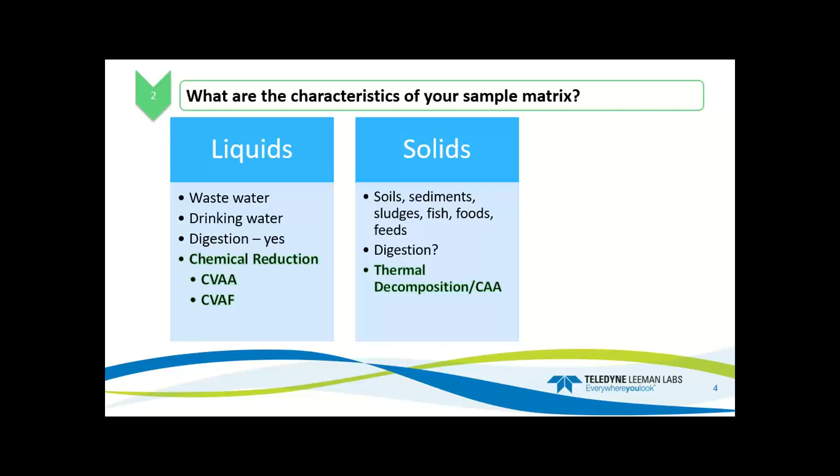So what are the characteristics of your sample matrix? If your sample is a liquid, like wastewater or drinking water, then you will most likely be best served by one of the chemical reduction techniques, like cold vapor atomic absorption or cold vapor atomic fluorescence. If your sample is a solid, you have the choice of digesting the sample and then analyzing by atomic absorption or atomic fluorescence, or you can eliminate the sample pretreatment altogether and employ direct analysis by thermal decomposition.

There are some other factors to consider. For example, the homogeneity of the sample, or known interferences like iodine or gold. And we can also run volatile hydrocarbons, which is kind of a unique matrix in itself. So some solid samples might need to be digested, and some liquid samples might be better using direct combustion. So it's really important to think about your sample characteristics when you're deciding on a technique.

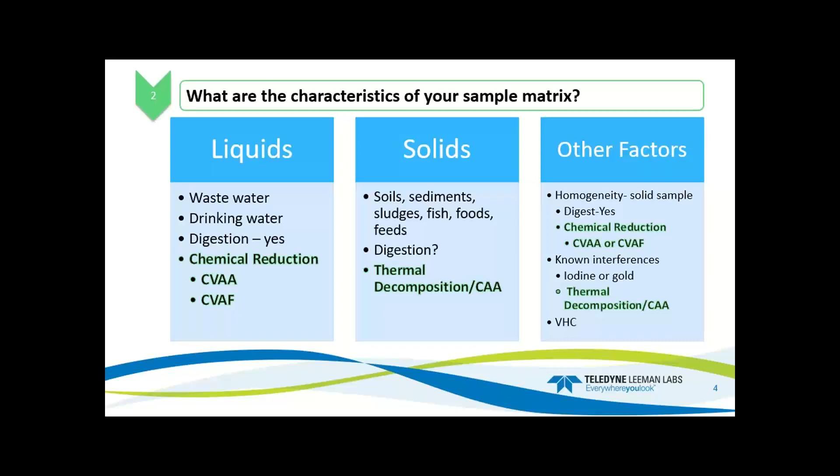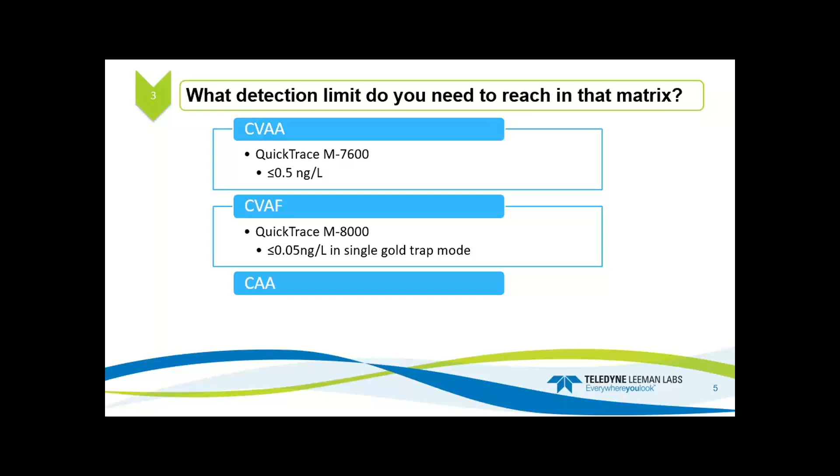So if your sample is a liquid, then detection limit requirements will drive your decision. So our QuickTrace M7600, which uses cold vapor atomic absorption, will provide a detection limit at less than 0.5 nanograms per liter. Cold vapor atomic fluorescence, using the QuickTrace M8000 instrument, will provide even lower detection limits at less than 0.05 nanograms per liter when using single gold trap modes.

And combustion atomic absorption has an instrument detection limit at less than 0.001 nanograms. But it's important to note that this value is from a mass-based analysis. So aqueous samples run on this type of system will have an increased detection limit, simply because the amount of mercury found in an aqueous sample is inherently more dilute than that of a solid sample. So it's important to keep in mind.

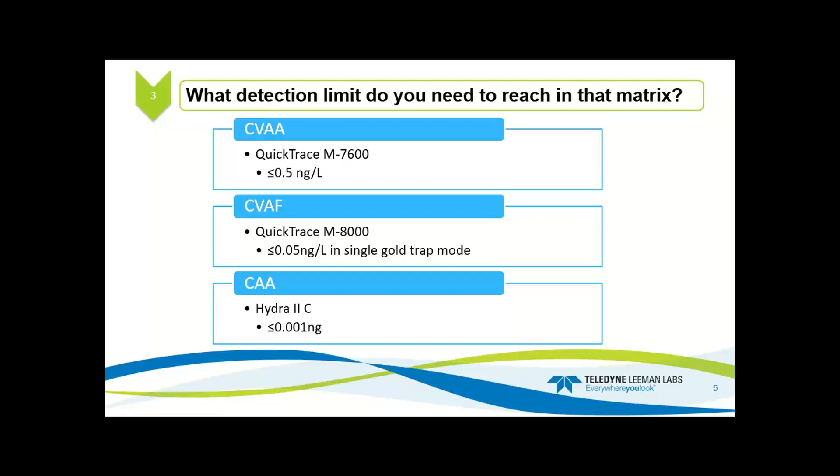Do you have a digestion procedure in place? So the digestion process for most aqueous samples is straightforward, and laboratories often have all the equipment necessary to perform this task already. Some laboratories split digested samples with other instruments like ICP-MS or ICP-OES, so sometimes it's just more practical to share samples. Or if you know your sample cannot be easily homogenized, then direct analysis can be inaccurate. So digestion of a larger sample size and then running on a reduction method is the safest route to ensure results that you're confident in.

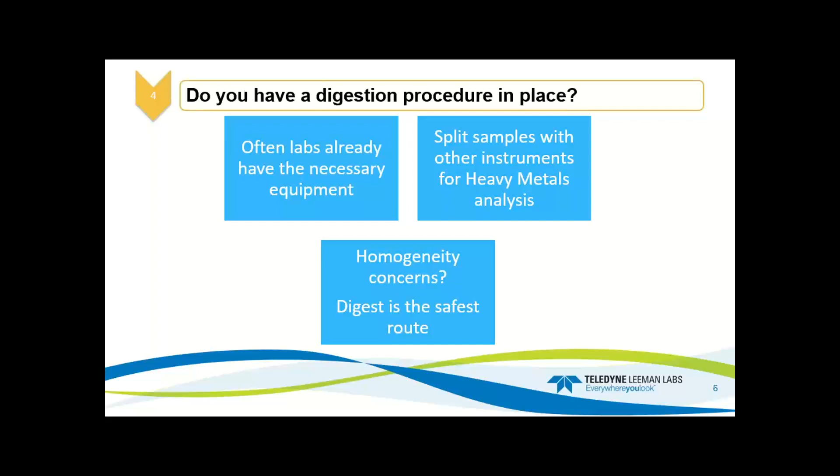And of course any budgetary considerations. So cold vapor atomic absorption is going to be the most economical choice in most markets, followed by cold vapor atomic fluorescence. So this has the best detection limits and the widest dynamic range for aqueous samples. You should also compare it to the cost and the wait time of sending samples out for this type of analysis if you don't already use it in your laboratory.

In combustion atomic absorption, the simplicity of this method is appealing. It also will help with your green initiatives in your laboratory, but it is a higher initial investment. So it provides advantages over time. So there's no sample digestion. You don't need to buy strong mineral acids or expensive reducing agents like stannous chloride.

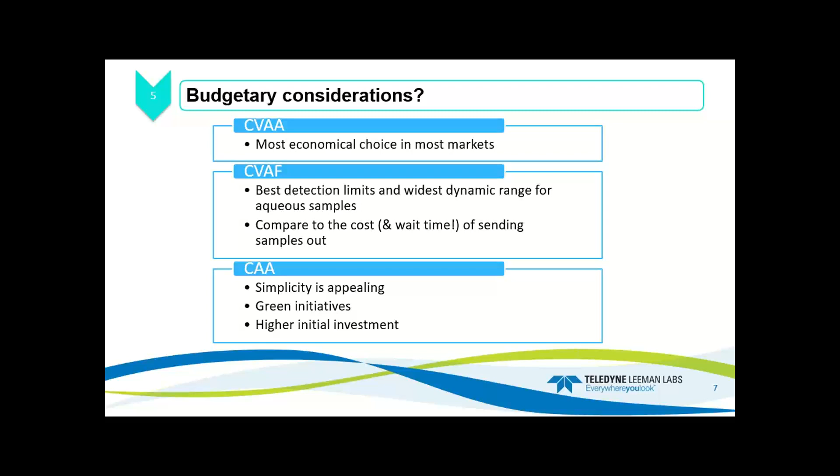There's no hazardous liquid waste generated that could be costly to have removed. So some of those will add up to savings. As well, with no wet chemistry prep, it also frees up your lab analyst time. And we all know that's valuable. So what technique is right for your application?

So now that we've gone through the 5 essential questions, I hope you've considered each of them for your laboratory situation. So keep those in the back of your mind as we highlight our most popular instrument for each of those techniques. This is kind of a family portrait of our Mercury instruments here at Teledyne Leeman Labs. So first up, we have the Quick Trace M7600. This operates by chemical reduction of the sample, followed by cold vapor atomic absorption. So it can measure mercury in the sub-nanogram per liter to high microgram per liter ranges.

Then we have the Quick Trace M8000. So this also operates by detecting mercury in aqueous samples by chemical reduction, but it has the option to pre-concentrate the mercury using gold trap amalgamation, and it's followed by cold vapor atomic fluorescence. And last but not least, we have the Hydra 2C. This operates by thermal decomposition of the sample, followed by gold trap amalgamation and atomic absorption. So it's best utilized for solid samples and typically requires no sample pretreatment. So let's start with the M7600.

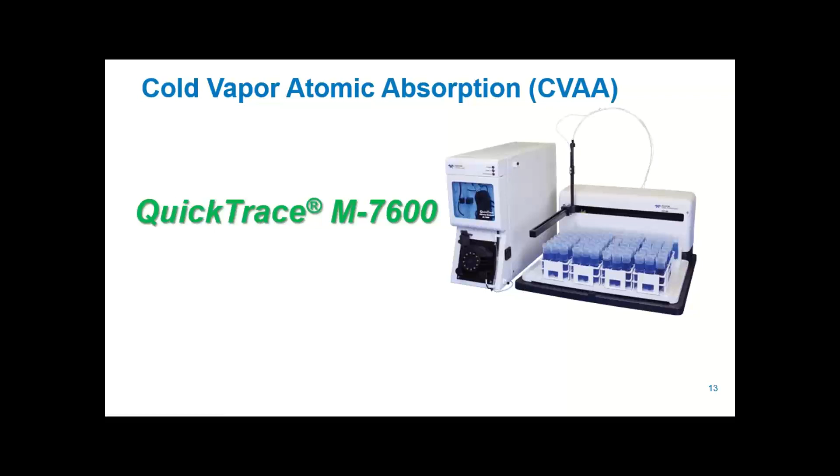So here it is. It's modeled after a desktop computer tower, so it takes up very little benchtop space. Here it is paired with the optional ASX560 auto sampler by Teledyne CETAC to automate sample introduction. So let's take a look at some of the key benefits and features of this instrument. The Quick Trace M7600 is the industry leader for mercury detection by cold vapor atomic absorption. It's trusted by large lab networks throughout the US and Europe. We have preloaded common method templates built into the software, so analysts can just press go.

This instrument will also help support your green chemistry initiative. So we've created a small inner diameter tubing harness that reduces sample consumption, reduces reagent usage, and liquid waste generation. We have developed methods using those tubing harnesses that are very efficient. They're only about 70 seconds a sample in peak area mode. So at that rate, you could run almost 50 samples in an hour. And you get all the benefits from the reduced chemical usage.

And another key benefit is its flexibility. So this is our most versatile system. So while it has common methods preloaded into the software, like I mentioned before, it's easy to adapt the usable ranges by making adjustments in the software. So there's no hardware changes needed. This is great for academia and research labs. And also the Quick Trace software itself that runs the instrument is very flexible, has multiple pathways to guide you through the user interface. It's very intuitive, but it's also customizable.

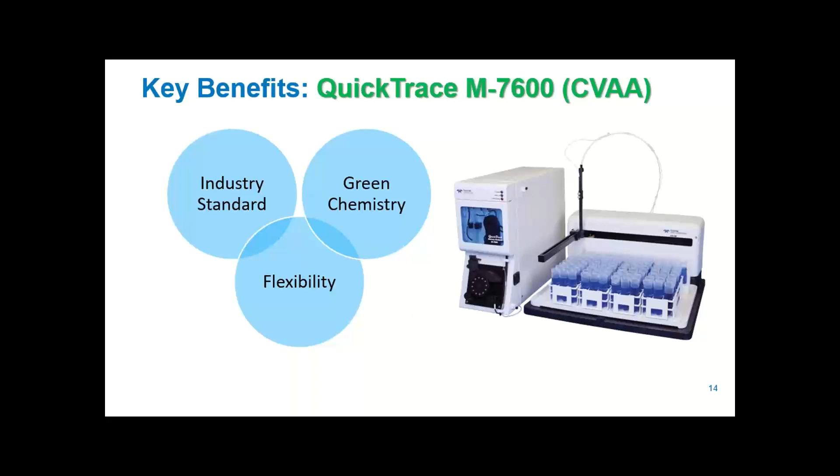So let's dive into some specific features that set this instrument apart. So first we have our gas liquid separator, our GLS. It has a frosted center post design. This provides a large surface area to liquid volume, which allows for rapid evaporation of the mercury vapor from the sample. That stable, thin film over the post provides reproducible signals and precise results. It's non-bubbling, it's non-foaming, and it also has overflow prevention built right into the mount.

Next is the peristaltic pump. It's a 12-roller, 4-channel peristaltic pump. It's top of the line. It's the same kind that's used in high-end ICP instruments. It also provides very stable liquid uptake, so that helps contribute to those reproducible signals.

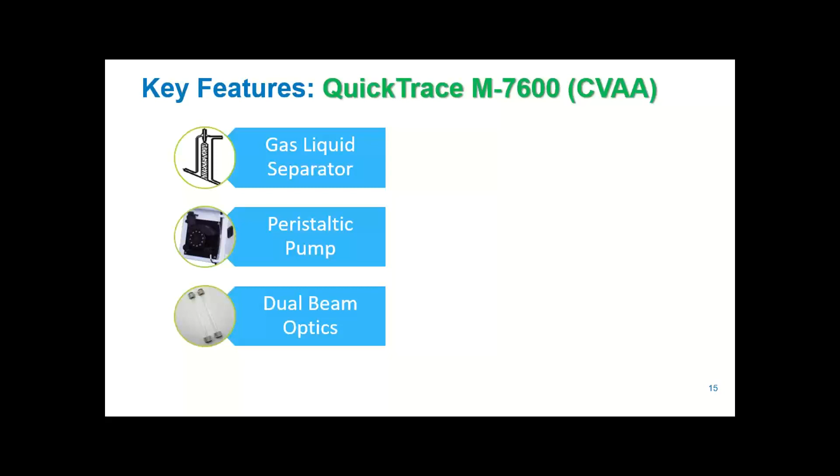This instrument has true double beam optics, so it has a superior baseline stability. The detector compartment is thermally stabilized. We also have a feedback monitor that will make automatic adjustments to lamp energy for stability throughout the lifetime of the lamp. This is important because it keeps your IBL constant even as your lamp ages.

Green initiative, I mentioned this a little bit before, but using our green chemistry tubing harness, you can reduce the total waste generated by about 40%. It also reduces stannous chloride reagent uptake by 53%, which if you buy stannous chloride, you know how expensive it is. So that can add up to substantial savings over time.

The QuickTrace software is extremely flexible and intuitive. It has advanced contamination controls, overrange detection, and smart rinse features built right in. It offers tracking of consumables and maintenance tasks and will alert you when they need done. And one of my favorite features is that the worksheet files can be emailed directly. So you can send them to your team members, you can send them to our service team if you need method development help or system troubleshooting. It makes it really easy.

And speaking of our service team, we have an unparalleled no-hassle support team. So we're available anytime to help with troubleshooting, method development, spare parts, training opportunities, whatever you need, we're here for you. So we will never just install your instrument in the lab and walk away. Getting your business is just the beginning of that relationship for us. We want you to be successful.

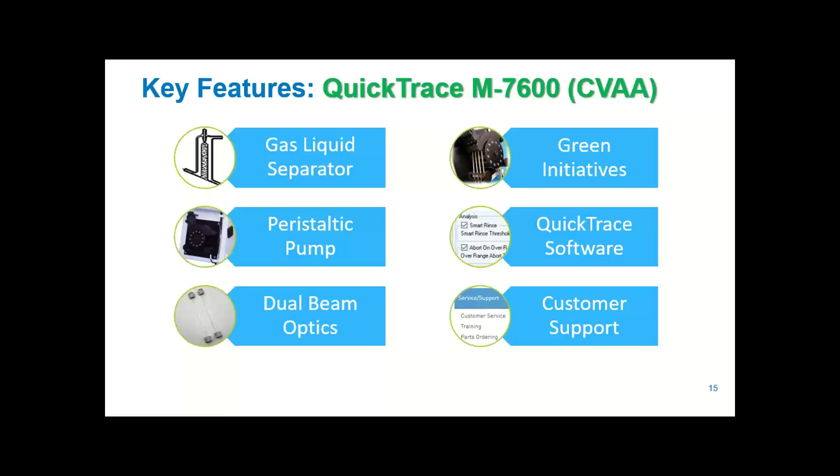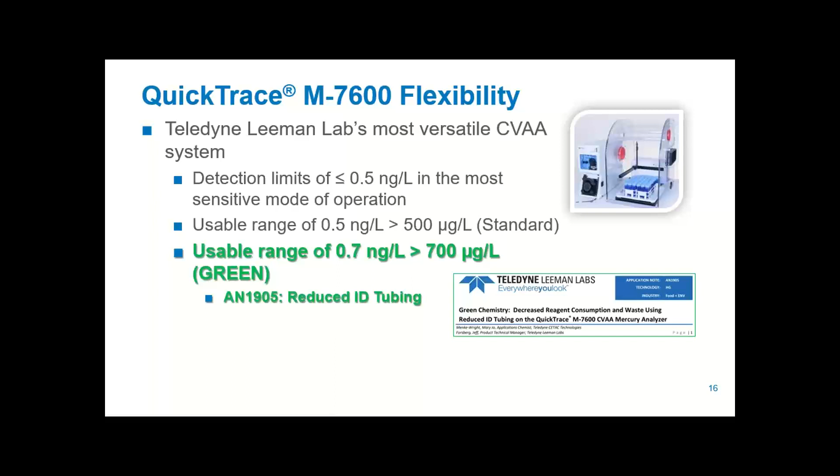So again, it's easy to adapt the usable ranges of this instrument by making changes in the software. So by simply changing the pump rate, the sample uptake, and the gas flow, one of those, all 3 of those, it's up to you. You can change the response range of the instrument to fit your application.

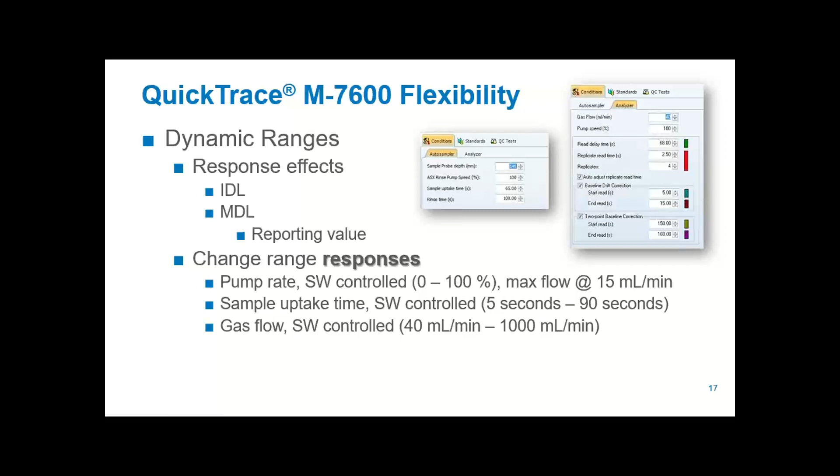So here's the flow path and some of the theory of operation behind the M7600. So the sample and reagents flow to the GLS by the peristaltic pump. The stannous chloride mixes with the sample and reduces any mercury in the +2 valence state to its elemental form, mercury 0, while they travel to the GLS. So the liquid mix flows over the center post.

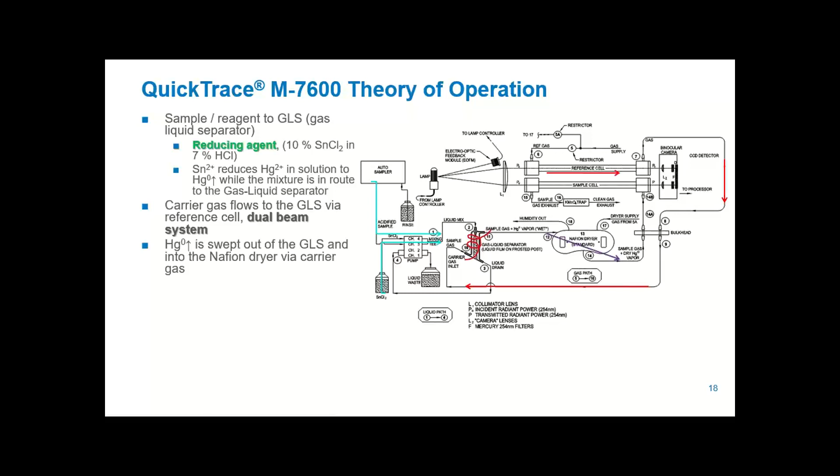The carrier gas then flows to the GLS by the reference cell and sweeps around the center post. This sweeps the mercury vapor into the Nafion dryer and removes the water vapor from the gas stream. And then the dry mercury vapor flows into the sample cell to be detected by absorbance with an incident light source of 253.652.

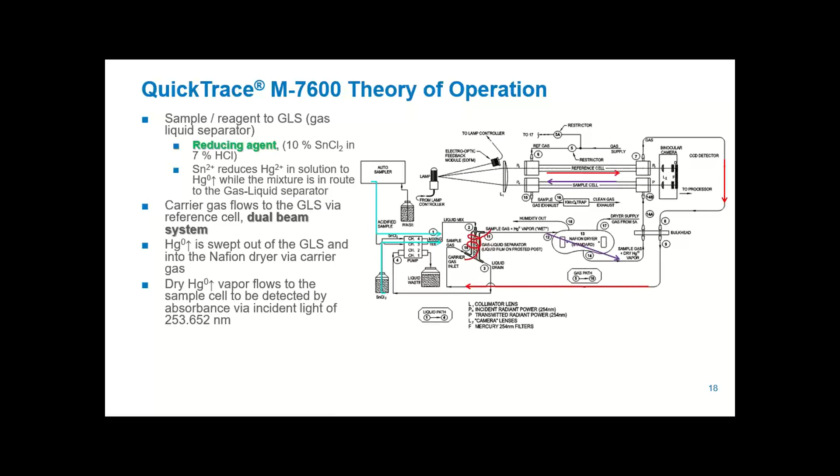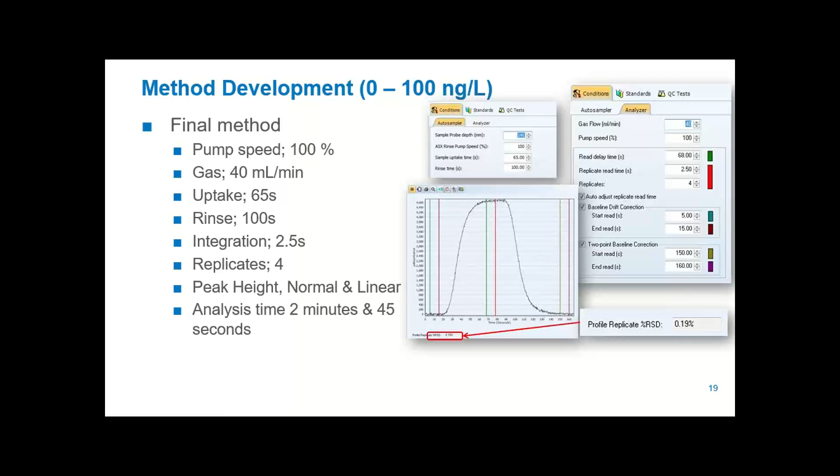So here is a typical 100 ppt peak profile. So here are the settings on the left for the instrument. And you can see we get this beautiful plateau where our peak is integrated across the maximum peak height. And it comes all the way back down to the baseline in about 2 minutes and 45 seconds. And you can see the replicate of those integrations is only 0.2%.

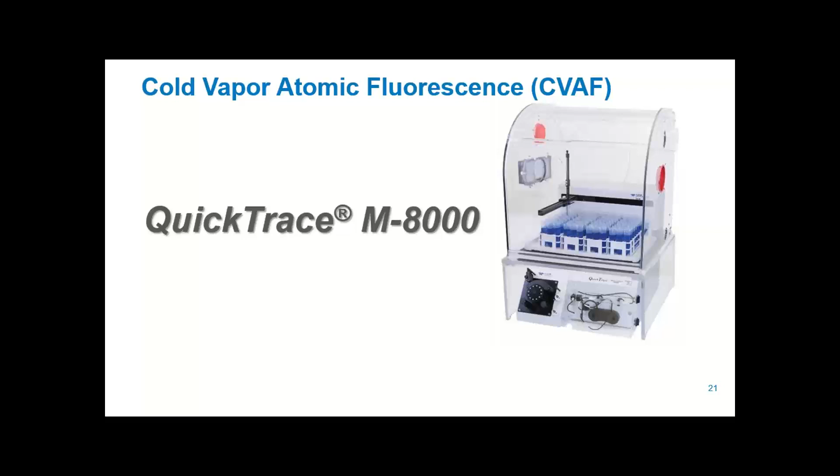So let's go ahead to the M8000. So this setup utilizes a platform. You can see the ASX 560 autosampler is on top of that, and then there's an enclosure around the autosampler. So it has this stackable design that just sits perfectly on top of each other. So it helps reduce the footprint on your desktop, and also just looks nice and clean and sharp.

So what benefits set this apart from other instruments? So foremost is the ultratrace analysis. This instrument can reach levels as low as 50 picograms per liter when utilizing gold trap amalgamation mode. So it's made to satisfy the lower and lower limits required for clean water analysis.

It also has ambient air control. So since this instrument does use pre-concentration of mercury on a gold trap, mitigating mercury contamination from the lab environment is very important. So this system has intuitive gas controls that eliminate air infusion onto the gold trap during the sample probe movement. So ambient air is diverted away from the gold trap, and any mercury contamination in that air goes to vent. So it doesn't have an additive effect on the sample.

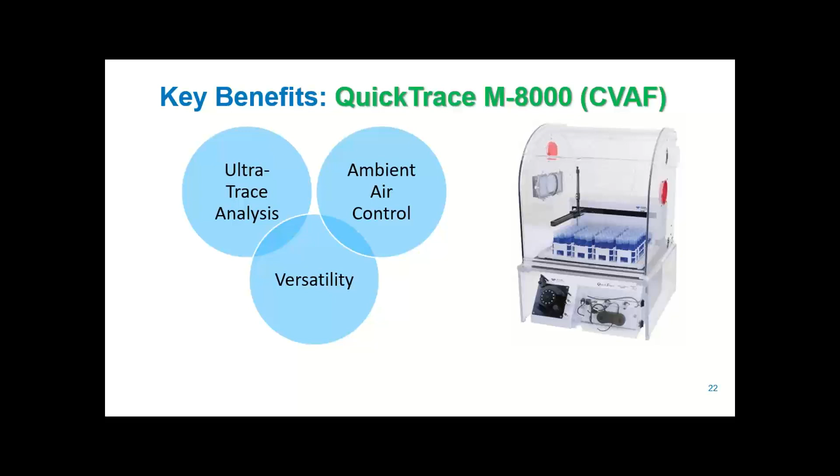It's also very versatile. So while we really boast about those ultra-low detection limits, it's versatile enough to analyze samples greater than 400 micrograms per liter without dilution. And this is because it has 3 modes. You have regular continuous flow CVAF, which is for those higher level samples, and then single or double gold trap amalgamation modes as well. You have access to all 3 of those modes in the software. There's no hardware changes or tubing configuration changes, so you can switch them out as you need.

So just like the M7600, this instrument features the gas liquid separator with the center post design, the top of the line peristaltic pump, and the reliable QuickTrace software. It also has 3 modes of operation: continuous flow CVAF, single or double gold trap pre-concentration followed by CVAF. And again, there's no need to make any hardware or tubing changes to use any of these modes. They're selected in the software.

And one of the biggest features is that this instrument can meet those low detection limits required for methods that are used to satisfy the Clean Water Act regulations. Again, it's easy to adapt the usable ranges of these instruments. So this instrument has 4 variables, so pump rate, sample uptake, and gas flow, like the M7600.

But it also has the option to lower the PMT voltage, which reduces the overall sensitivity of the instrument and can decrease the response. So you can change the range to fit your application. So typically this instrument can detect between 0.05 nanograms per liter up to more than 400 micrograms per liter.

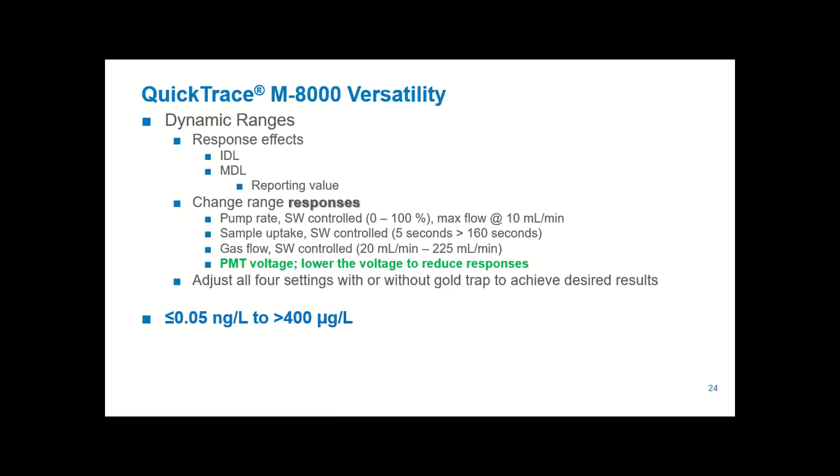So here is the flow path for the M8000 and some theory of operation. So it operates by cold vapor atomic fluorescence, as I've said. So we're going to digest our samples to get the mercury into the +2 valent state. Then we're going to reduce that to elemental mercury by sodium borohydride or stannous chloride, depending on your method.

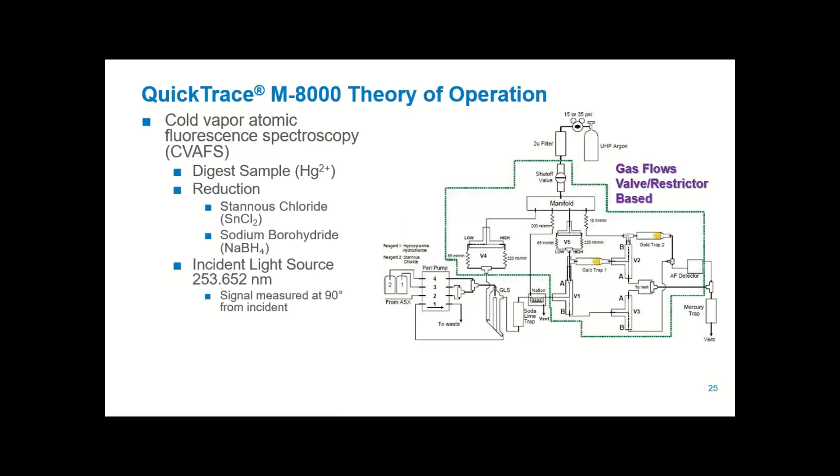And then we'll detect it with an incident light source at 253.652. And atomic fluorescence is the signal measured at 90 degrees from the light source. So let's start with our carrier gas flow, which is a high purity argon. So our carrier gas flow is controlled by a series of restrictors and valves. So depending on the mode of analysis, you'll run at 15 psi or 35 psi.

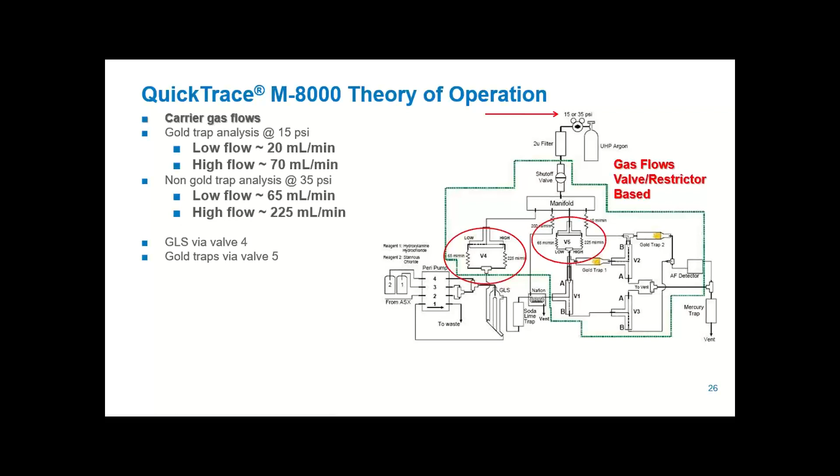And then the GLS is supplied from V4, while the gold trap is supplied via V5. So here's the flow path. The sample and reagent flow to the GLS by the peristaltic pump. The stannous chloride mixes with the sample and reduces any mercury into its elemental form while they travel to the GLS.

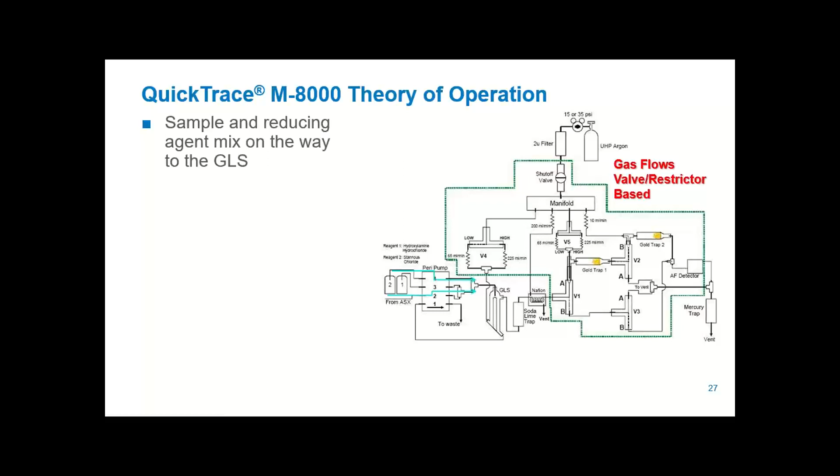That liquid then flows over the center post. The carrier gas flows towards the GLS and sweeps around the center post. So it takes that elemental mercury vapor into the Nafion dryer, which removes the water vapor from the gas stream. The dry mercury vapor flows into valve 1. In non-gold mode, which is continuous flow, the gas will flow from V1 to V3 and then on to the atomic fluorescence detector.

In gold trap analysis mode, the gas will flow from V1 to V3 during that ambient air control time I mentioned before, and then it will switch from V1 to V2. So this will load the gold trap with the mercury from the sample, and once it's loaded, the trap is heated, and the concentrated mercury will flow into the atomic fluorescence detector.

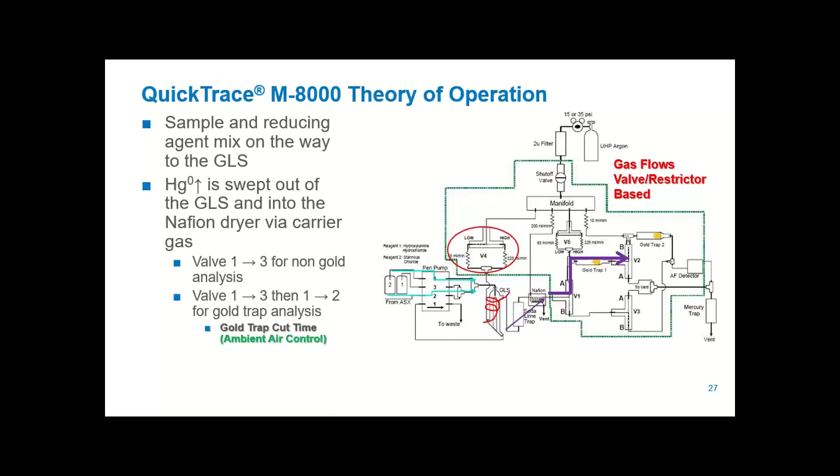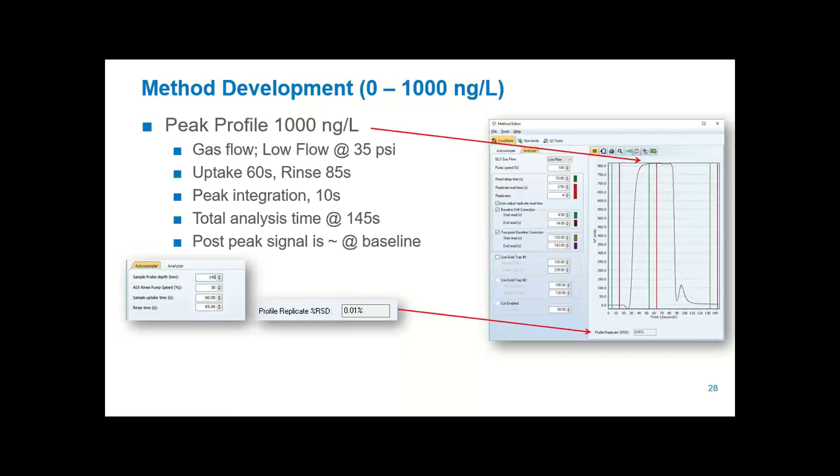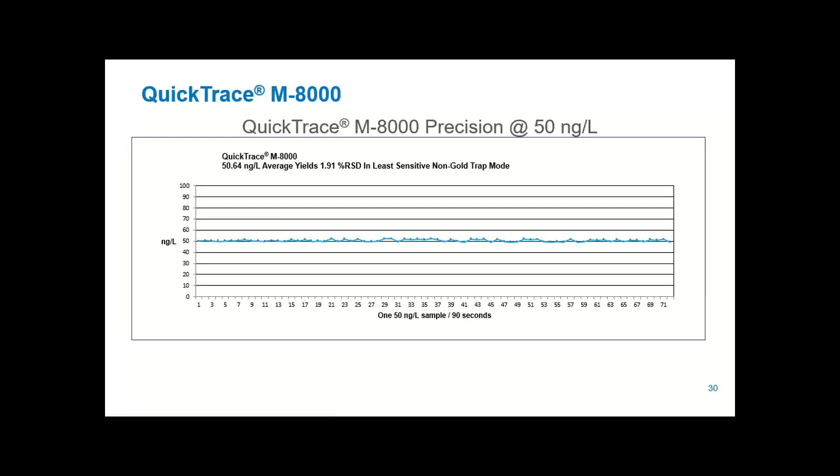So is cold vapor atomic fluorescence and QuickTrace M-8000 right for your application? If you need to run any of these methods, 245.7, 1631, some European norm methods, ISO methods, then you will need to use atomic fluorescence. These samples can include liquids, sediments, or tissues. They will need to be digested. If your detection limit needs to be less than 0.1 for continuous flow or less than 0.05 for gold trap mode.

And ultratrace analysis is a worthwhile investment in your laboratory. It's a little more expensive than atomic absorption, but you have to consider other things like sending out samples for atomic fluorescence. And if you're required to use it, then you've got to have it.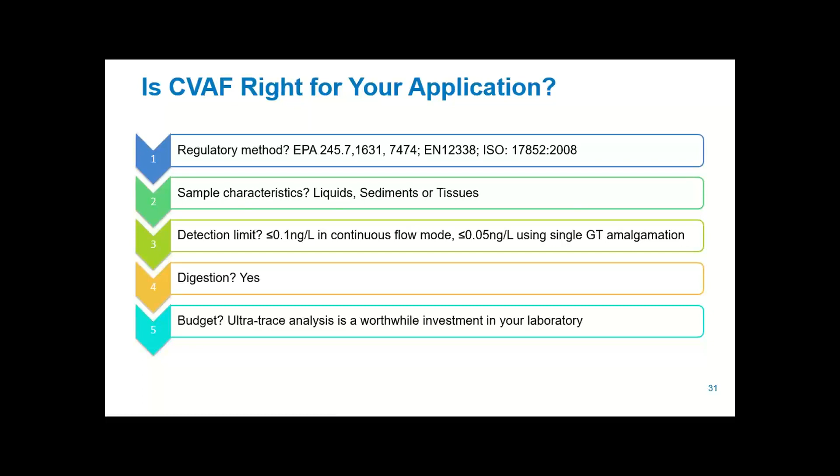So let's move right along here to the Hydra 2C. This is our last instrument to cover, and I know I'm not supposed to pick a favorite, but I think this is my favorite instrument. It's Hydra 2C. It operates by combustion atomic absorption.

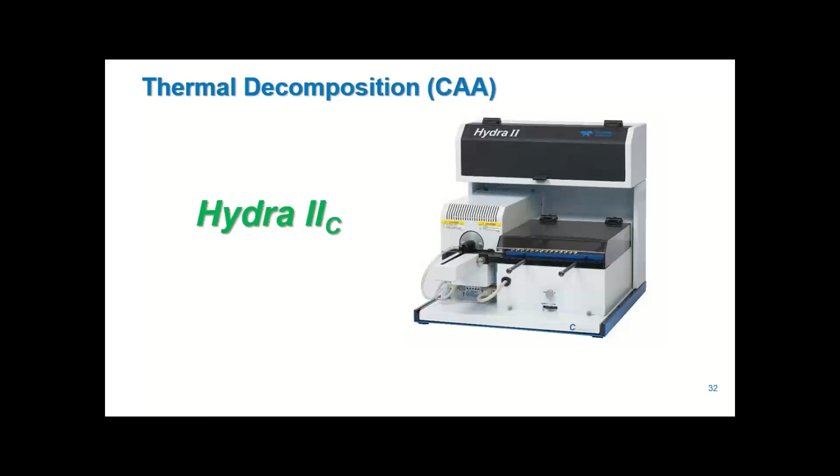So what are some advantages of using thermal decomposition? The simplicity. You simply cannot get any simpler for solids analysis. There's no chemical pretreatment needed for solid samples. There's no digest or matrix matching needed. The analyte is weighed directly in the boat, then it's thermally decomposed in its native form. So you don't generate hazardous waste from spent samples. It's easy to prepare the sample runs on this instrument. It really is as easy as weighing samples and loading them into the autosampler rack.

Its modular design. This system was engineered to make it easy to maintain and convert. There's quick access to serviceable parts, like changing the gold trap and the catalyst tube. It takes less than 2 minutes, and there are no tools required to get to those parts.

And also green chemistry. This goes back to how simple this instrument is to run. There's no need to purchase those strong mineral acids, oxidizers, expensive reducing agents, because there's no digest required. So you have no acidic aqueous waste generated compared to the other chemical reduction methods as well.

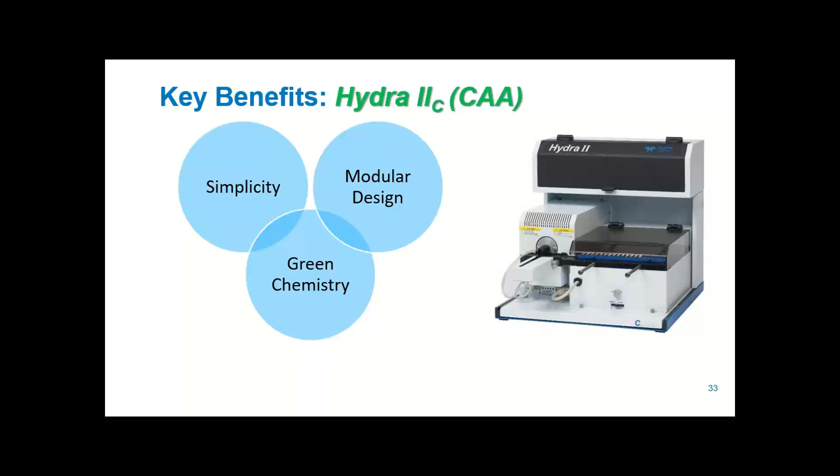So some key features. Probably the most important benefit is thermal decomposition has the ability to report accurate results regardless of differences in sample matrix. That means you can run a wide variety of sample types on a single calibration curve and have no need for matrix matching.

This instrument also has a pressure monitoring system, so it gives real-time pressure results. This can help verify the gas flow path is complete. It also gives insight into the life of the catalyst tube. So it gives you the necessary information to feel confident that you're ready to start your analysis. It has a built-in autosampler, so it's really easy to operate. It's all in one, so there's no need to purchase separate automation. You can just load up the sequence and hit go.

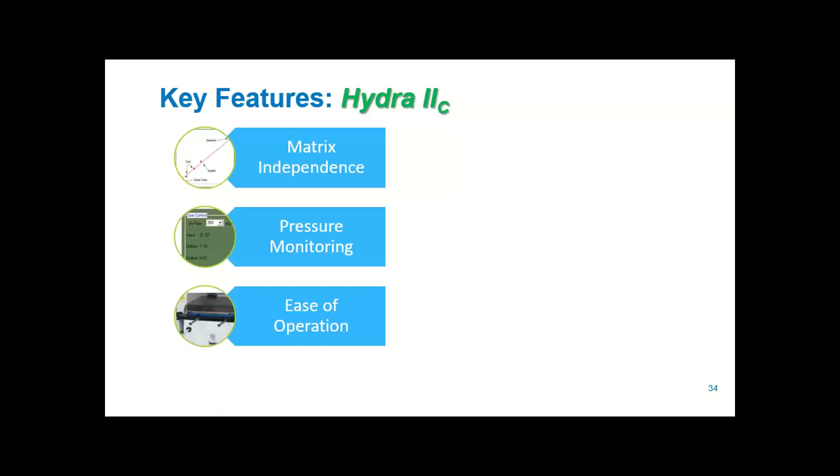Its modular design makes this system really easy to maintain. There's quick access to serviceable parts, like I mentioned before, like the gold trap and the catalyst. You don't need any tools, and it's very quick. And also the optics are very accessible, the lamp compartment.

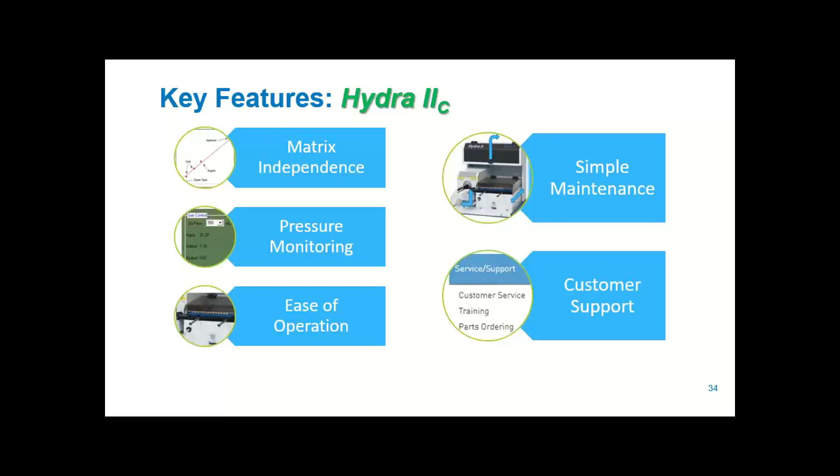So when is thermal decomposition the most useful? For the analysis of solid samples. There's a wide range: soil, sediment, sludge, fish, plants, petroleum products. Any sample that's difficult to digest or is non-homogeneous. And then samples that have a known chemical interference for the chemical reduction methods, like iodine or gold.

And while you can run a limited number of aqueous samples by thermal decomposition, it was really engineered for US EPA 7473 to analyze solids and semi-solids. To run aqueous samples, it requires extra drying time, which is dependent on the sample size and the moisture content. And it also requires the use of an additional inline chemical dryer to protect the optical cells from moisture. So it's not impossible, but you do have to have extra preventative steps in place to protect your instrument.

So we have direct determination of mercury. We can get down to trace level for solids and semi-solids. We can do low microgram per liter, so part per billion levels in aqueous samples. You'll need that additional drying time and that external chemical dryer. And we can do low nanogram per gram levels for petroleum and petroleum distillates.

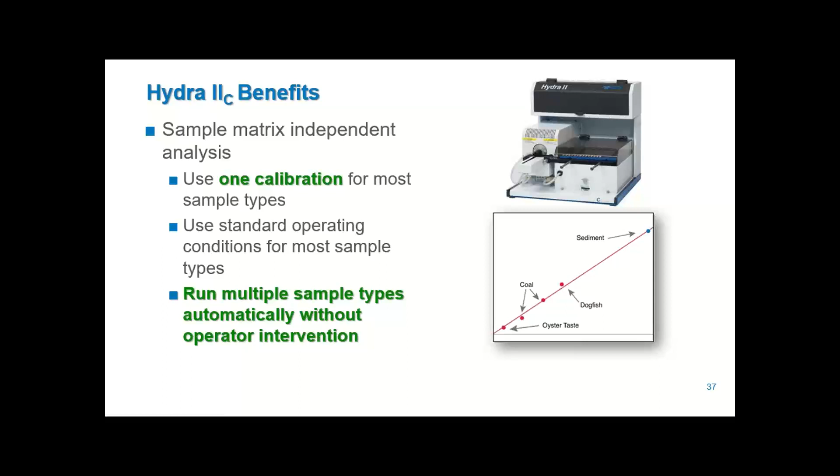And again, my favorite benefit, the sample matrix independence. So you can run one calibration curve. You can use standard operating procedures, just modify your drying time. And you can run multiple sample types without any operator intervention. So here on this graphic, you can see that we ran sediment, fish tissue, and coal all on the same calibration curve.

So how it works, here's some theory of operation. It's direct analysis: thermal decomposition followed by atomic absorption. Our dynamic range is typically between 0.001 to 1500 nanograms. We combust the sample, which converts any mercury to elemental mercury, and then we pre-concentrate it on a gold trap. So there's no reducing agent required. The combustion takes care of all of that. So no stannous chloride, no sodium borohydride.

And our incident light source is the same, 253.652. And it works in 7 steps. We load and inject the sample into the furnace. We dry and combust it in stages. We purify the sample in the catalyst tube. We remove moisture in the Nafion dryer. We collect it on the gold trap, release it, and then we detect it.

So our spectrometer uses two cells. We have a split 10-inch high sensitivity cell and a 1-inch low sensitivity cell. The use of two cells provides the best detection limit and a wider dynamic range than with a single optical cell path.

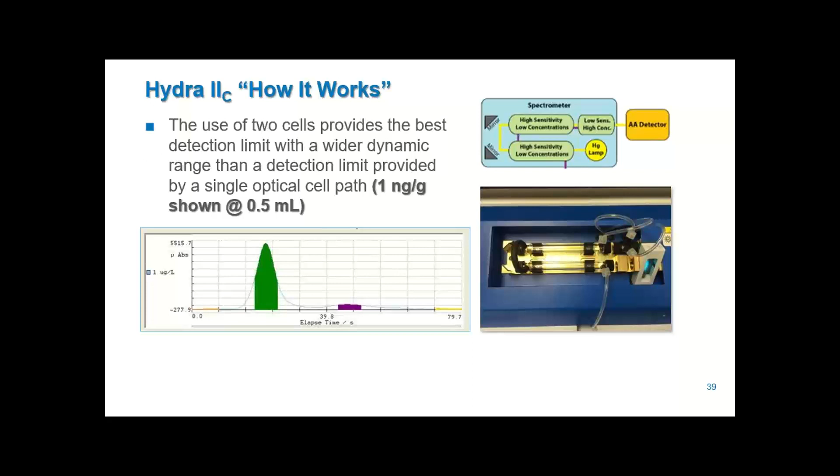So here's a 1 nanogram per gram peak profile. You can see the green area is the integration in the high sensitivity cell, and the purple is from the low sensitivity cell. The green cell is about 10 times higher because it's about 10 times the length. Both are integrated for every sample, and then the software decides based on the calibration curve which to report against.

Typically our low range is from 0 to 50 nanograms of mercury, and our high range is 50 to 1,000 or 1,500, depending on if you have really high level samples. And I also like to include the blank in the high concentration. I feel like it helps dial in the lower end of that curve.

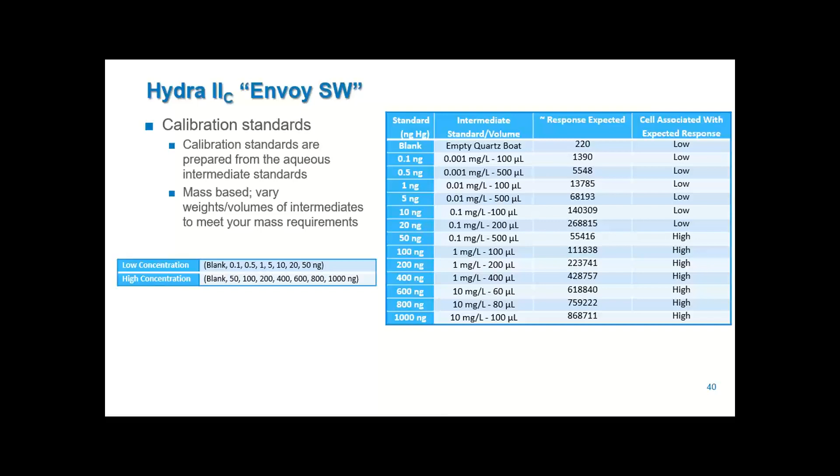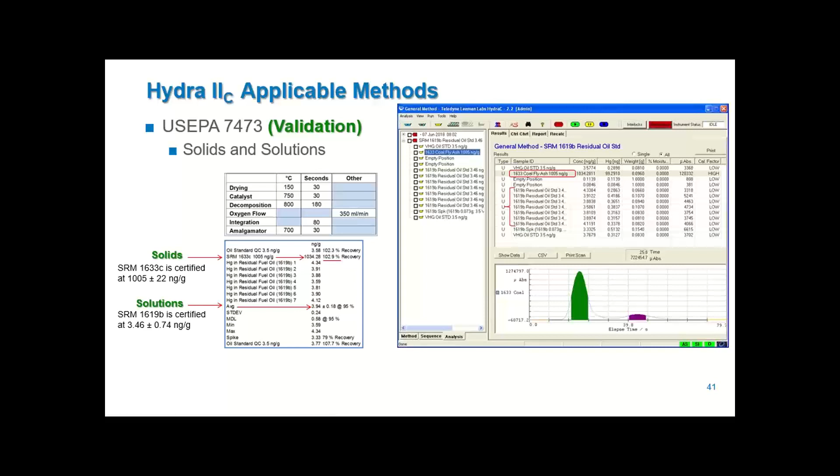So here's some real life analysis and a little view of the software. Here we were able to validate 3 different combustion AA methods in one sequence in one afternoon. Let's start with US EPA 7473, which is for mercury determinations in solids and solutions. We analyzed SRM 1633C, which is a solid coal fly ash sample, and SRM 1619B, which is a residual fuel oil. Both were well within their certified limits. So that's a solid and a solution.

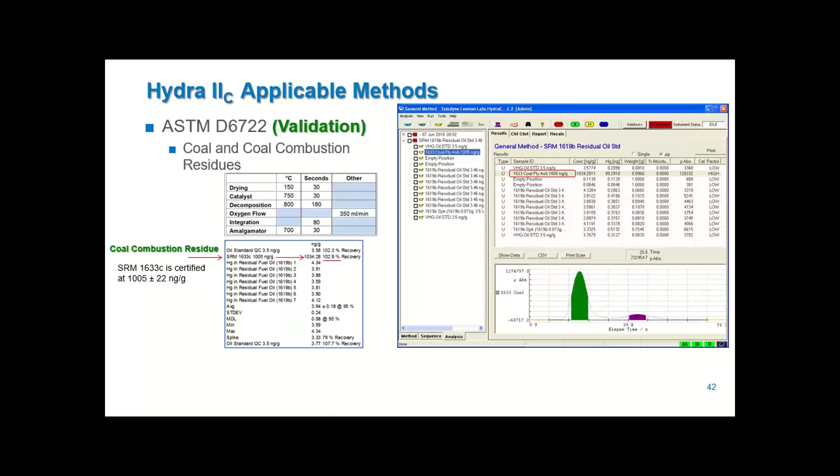Next, we have ASTM D6722, which is also verified by that coal ash sample because it's for coal and coal combustion residues. That came in at about 102% recovery, so looking good. And then ASTM D7623 is validated using 7 replicates of that fuel oil reference standard. It came in at 3.94 nanograms per gram, which is well within that certified range.

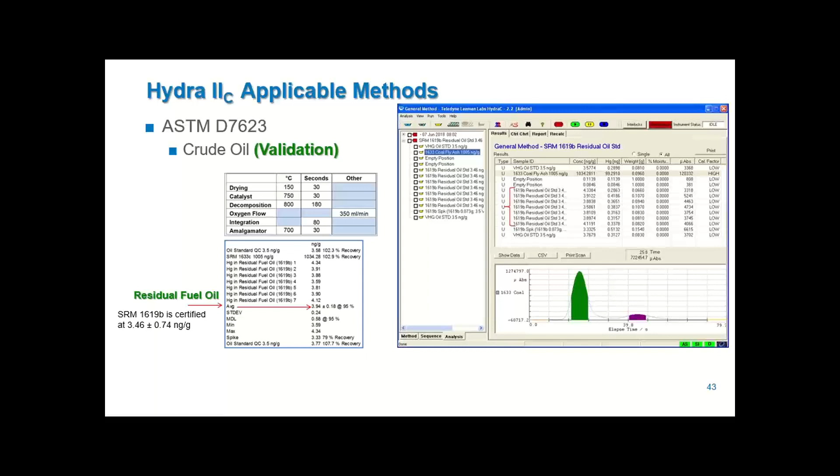So we can run multiple matrices on a single calibration curve in one afternoon and meet the requirements for all 3 of these global methods. I just think that's really impressive. So is CAA right for your application? If you need to meet any of these regulatory methods, if your samples are mainly solids and you don't want to digest them, if you need a detection limit of less than 0.001 nanograms. It is a higher initial investment budget-wise, but you get those advantages that lead to cost savings over time.

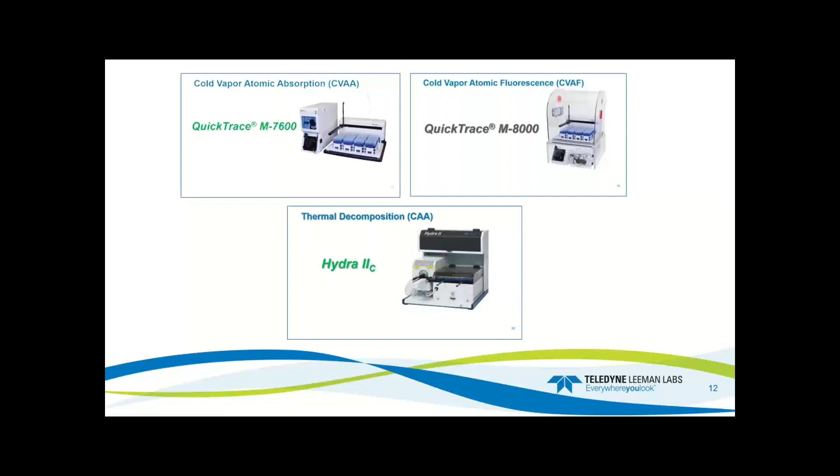So here is the family photo again. You can see the QuickTrace M7600, which is our cold vapor atomic absorption unit, the QuickTrace M8000, our cold vapor atomic fluorescence unit, and the Hydra 2C, which operates by thermal decomposition.